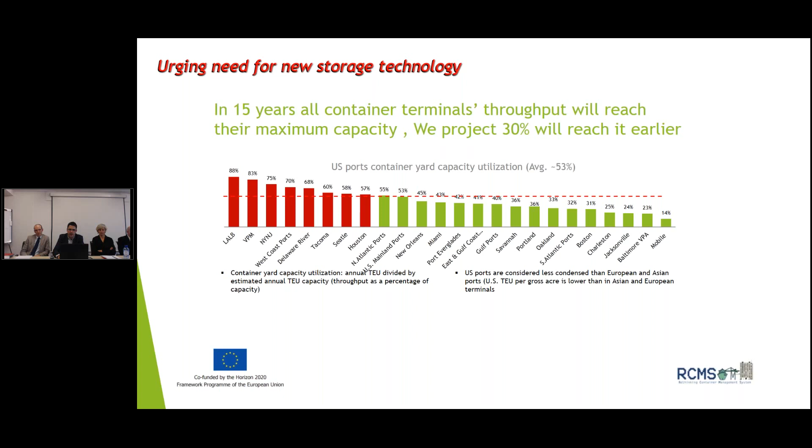And of course, there are the trivial alternatives, which are building a new port, a new terminal. But not always is it easy, not always is it a simple solution, because as you see now, the next slide shows a few examples showing that the cost of building new ports is, of course, tremendous. We're talking about hundreds of millions of dollars.

This is a very costly business, and we identified that we can suggest a new technology for vertical storage, a new idea, a new concept for how to store containers with less space, and then you need less area, smaller reclamation projects. Depending on the area, sometimes it's simply not possible to expand the current terminal, and sometimes you have to consider building a new terminal. And with having the RCMS, we can suggest existing terminals either to expand using less space, or build new terminals having a much more optimized land utilization.

Coming next, we see that in the future, more and more we discuss with clients and companies, and we see that there are more and more ideas to fulfill and develop concepts of vertical storage. We see examples in Tokyo, where a system was already built, and examples of concepts being developed in Korea and in Italy.

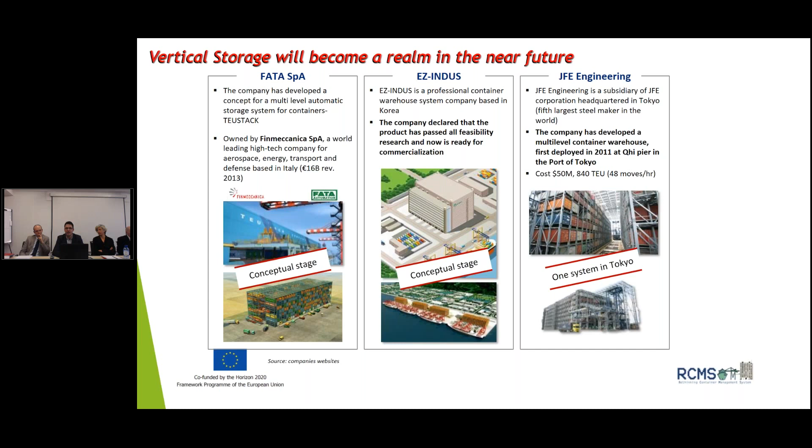And then we move forward to the financial analysis, which is part of a discussion by Niels from HPC.

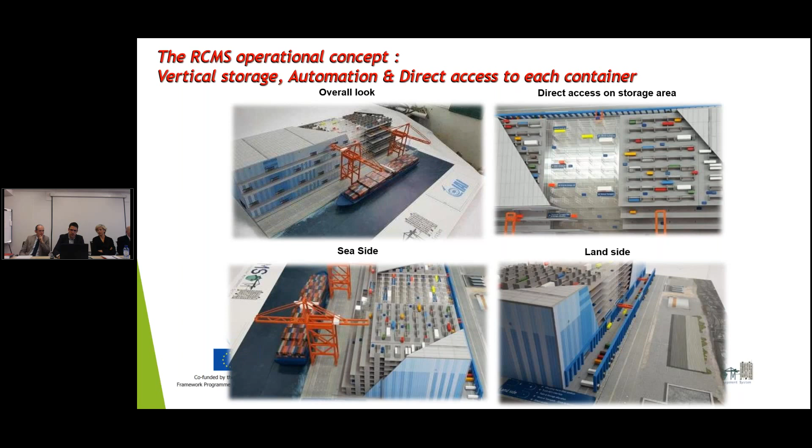So what we present with the RCMS is a vertical storage, automated, providing direct access to each of the containers, which we will see in a moment. We developed together with our partners a preliminary design for the building. We analyzed 10 and 15 floors high, and we came up with a concept that is end-to-end, dealing both from the sea side up to the land side.

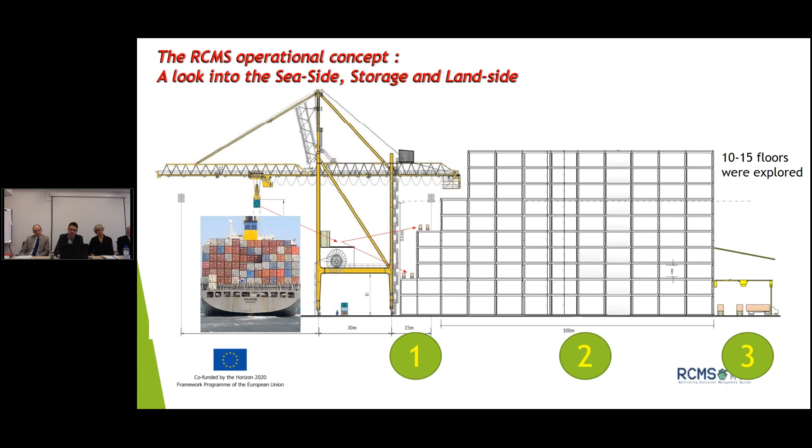We have a full separation between the two. We have balconies on the sea side, dealing with containers being received, unloaded or loaded from the ship. On the other side, we have what we call OHBCs, overhead bridge cranes, for the interface with the land side between the trucks and the AGVs. All the area in between is used for the storage of containers. Each floor has one height of containers, which is also why we have direct access per container.

On the balconies, the twist locks are unloaded before unloading the container onto the AGV. We use STS cranes, which have a platform between the legs of the STS to unload the twist locks, then bring the container without the twist locks on top of the balcony, on top of the AGV. We have queue management on top of the balcony, and we differentiate between the loading process and the unloading process.

For unloading from the ship towards the storage, it doesn't matter which free AGV we allocate. We have some sort of competition in our algorithm between the AGVs, and we allocate the specific AGV that comes, not necessarily the quickest, but at the time we best need it to be under the crane. As opposed to unloading, when we unload a container from the ship, it doesn't matter which AGV goes, but when loading a container towards the ship, we need to manage a specific order.

In order to do that, when a specific AGV comes before another AGV, what we have is a cyclic queue on top of the balcony, so they go in cyclic queue under the STS until the correct AGV is under the STS. When we implemented that, we also checked for any traffic jams because of that concept. There were none. Everything was working very smoothly.

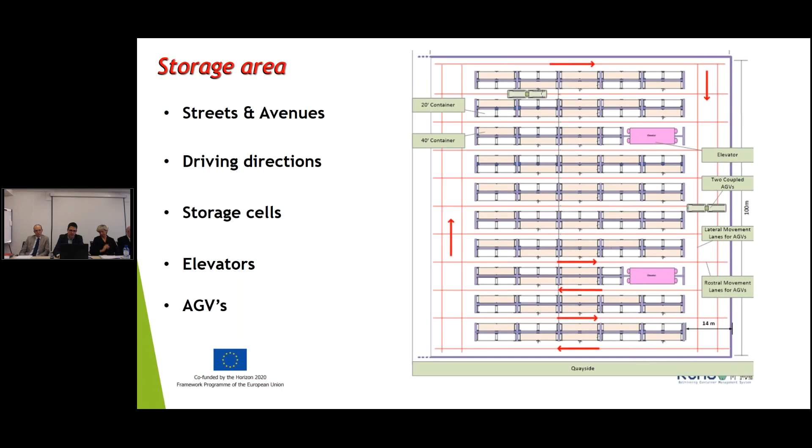Inside each of the cells, this is how it looks, already coming from the CAD file, then rendered in the movie. We have direct access per each of the containers, meaning the AGV is driving in the street, and with a single move it can go to either side and unload or load the container, so there is no shuffling.

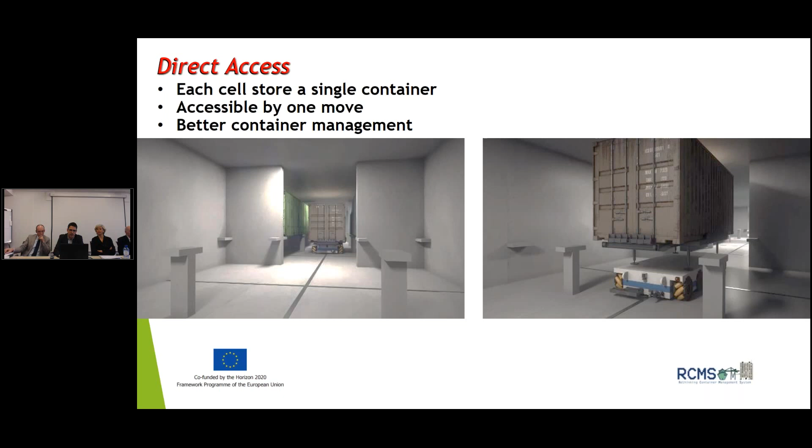We developed an AGV during the course of the project which is smaller than a single 20-foot container, and it goes below the container. It has a very unique platform with pistons, and as you can see, it goes below the container, using the lowering or raising of the pistons to take the container, then goes out of the storage place.

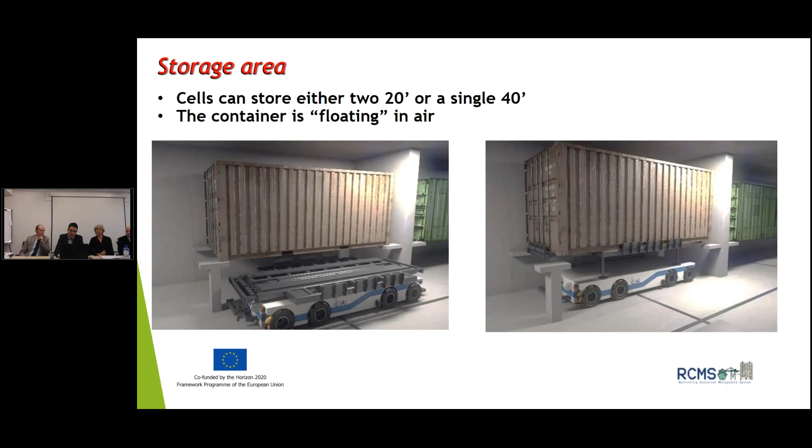It's magnetic tapes that the AGVs are following. This is the rendering of an AGV coming from the CAD file. It was fully designed with the mechanical teams. We had an algorithm team, software teams, and a mechanical team for the development and design of the AGV.

This AGV, what you see here, are two AGVs being coupled. It doesn't matter from which side of the AGV the other AGV is coming; we have the mechanism on both sides of the AGV, and then the AGV can be coupled automatically to carry one long 40-foot, or each of them can carry a single 20-foot.

The AGVs are omnidirectional, meaning that as you saw in the movie, they can drive in either direction. We tested thoroughly the performance of the AGVs with regard to vibrations and effects on the containers, and we saw that it performs pretty well. Although the velocity of the AGVs is lower than current existing AGVs, in overall performance it didn't really matter because of the algorithms and the optimized way we handle all the AGVs and resources within the building.

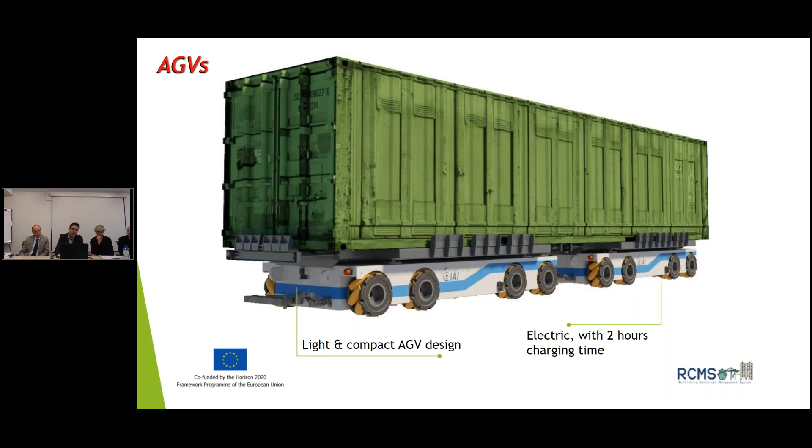During the course of the development, we did very thorough work integrating the interface of the control of the AGV and the physical world.

Do I have the time? Do you have time for 2 minutes to show a video? Okay, and we'll show you now.

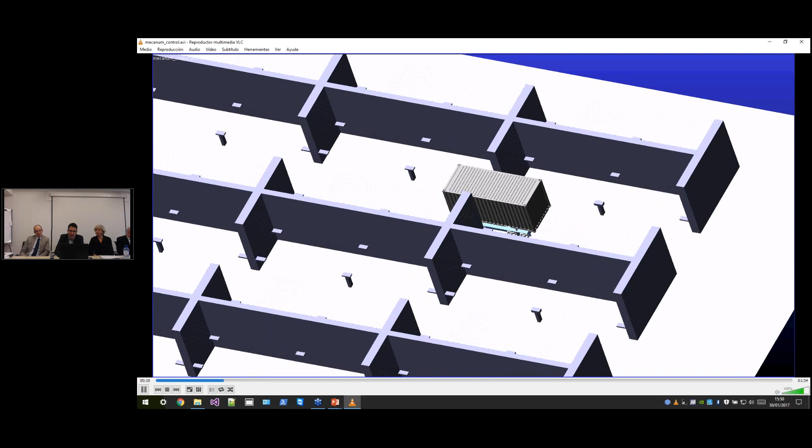This is a movie coming out from one of the design tools of the AGV. It's running a simulation of both the control and the physical world, and they are all interacting with each other.

You'll see in a moment that the movie, when you first see it, is decelerating towards a full stop, and that is simulated via the control, the Simulink. When it goes downwards, you see it's not going in a straight line; it moves a little bit sideways, and then the control is all the time fixing it.

What's important to understand is that all of that supports and backs the design, so that now we have something that really works, even though it's not yet existing. But using such tools, we can actually go to building such an AGV, and we prove that it's working according to the specification and requirements. This simulation takes into account sensors, motors, everything within the vehicle.

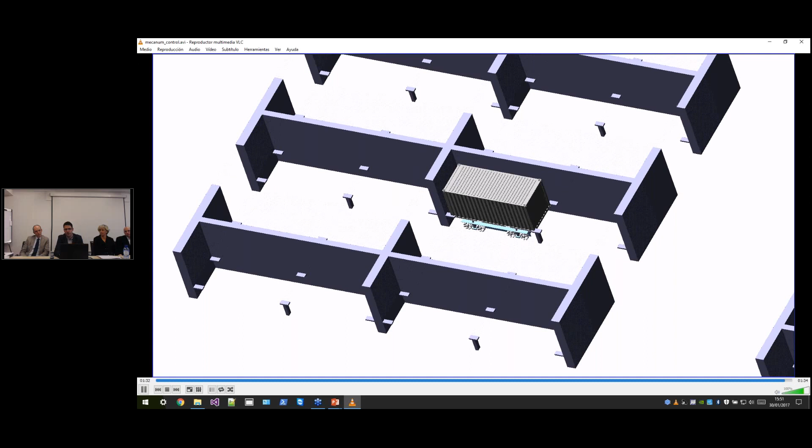And we developed all the control that then provides us with the performance of the vehicle, backed by the simulation: the vehicle velocity, the speed, the acceleration in each direction. Then later on, those parameters were provided to HPC to make the overall simulation of the entire building.

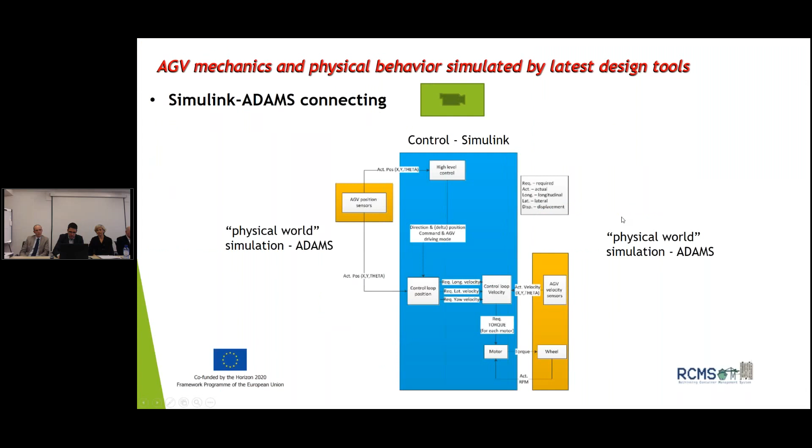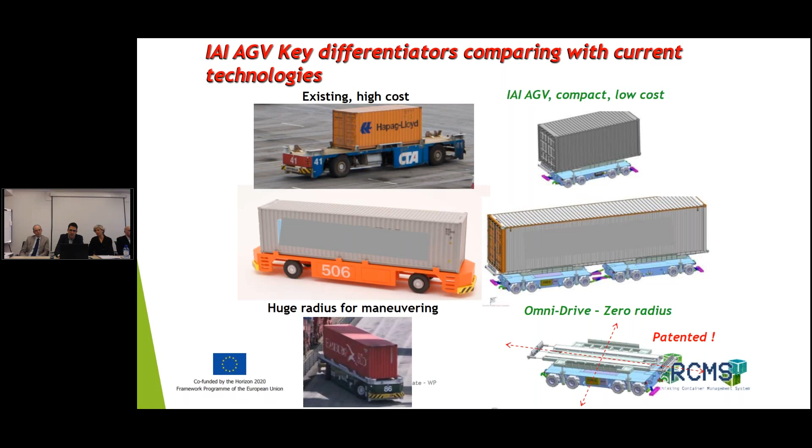And then one last slide, I think, about the AGV. When comparing it to the existing ones, we see that the existing ones are really huge, with huge radius for maneuvering, while our AGV is compact, light, zero radius for maneuvering, and of course much cheaper.

I won't get into too much detail about the elevators. It's a simple technology with cables, able to carry 70 tons. We did a design also for that one.

And then we are able to send the truck to the correct parking slot and the AGV to that specific parking slot. This was also tested with the simulation, and the algorithms performed very well.

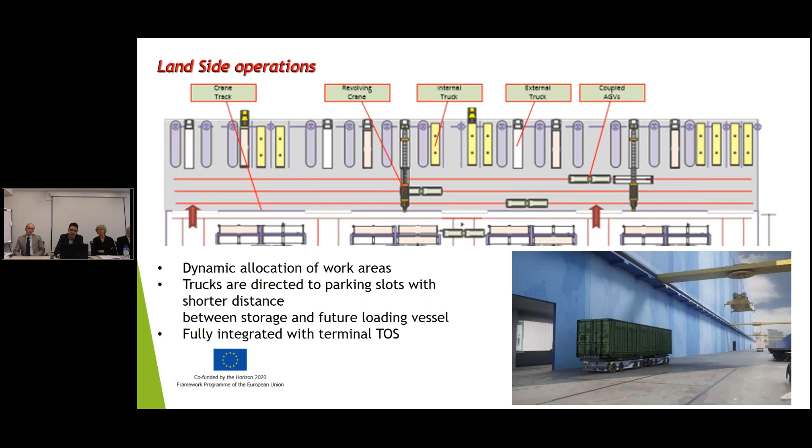So to summarize, we have done a feasibility study. We are ready for manufacturing, because now we have great confidence in our ability to move forward. We at IAI are now looking for partners worldwide to go hand in hand with us to build the first pilot and move forward, fulfilling our vision for the future of vertical storage, which we believe RCMS can have a major role in. So I thank you very much.

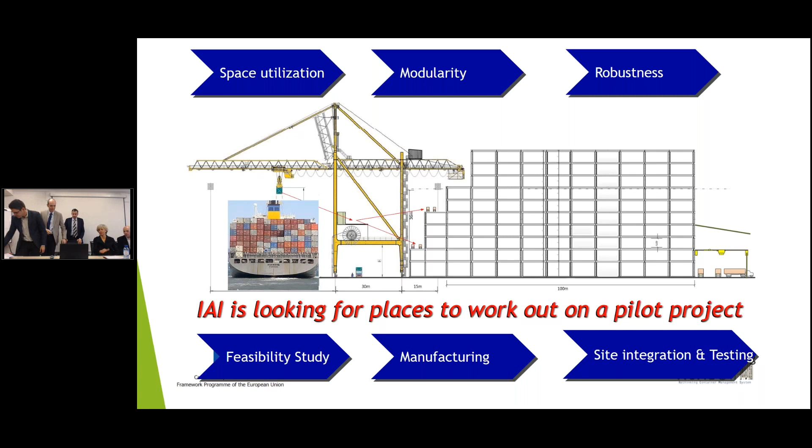So, also thank you, Anand, for the good introduction, which is a good starting point for my presentation. Having seen the basic functionalities and idea of the RCMS, I would like to address whether the RCMS is actually a better solution than other systems, whether it is more efficient. For that purpose, we compared the RCMS with regards to several aspects, mostly operational and financial, against state-of-the-art systems.

As state-of-the-art systems, we consider on the one hand the RTG TTU system, rubber-tired gantry cranes working together with simple manual trucks, a fully manual system. This is a benchmark since it's still the most popular system in the world. The other benchmark clearly is the ASC AGV system, automated stacking cranes combined with traditional diesel-powered or electrically driven automated guided vehicles. We compared the RCMS against these two systems.

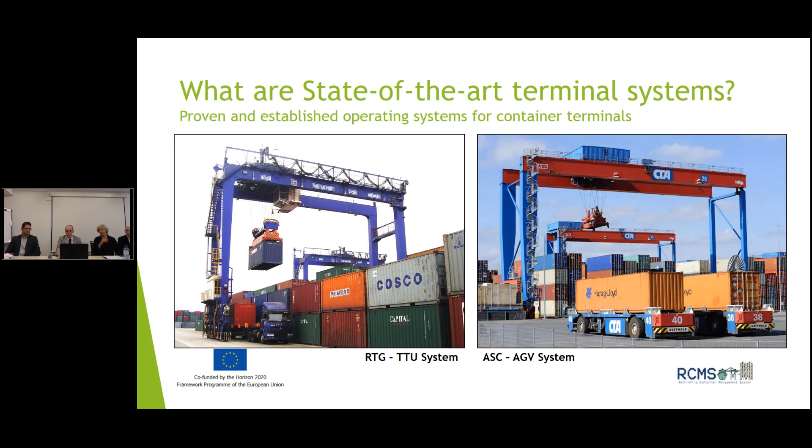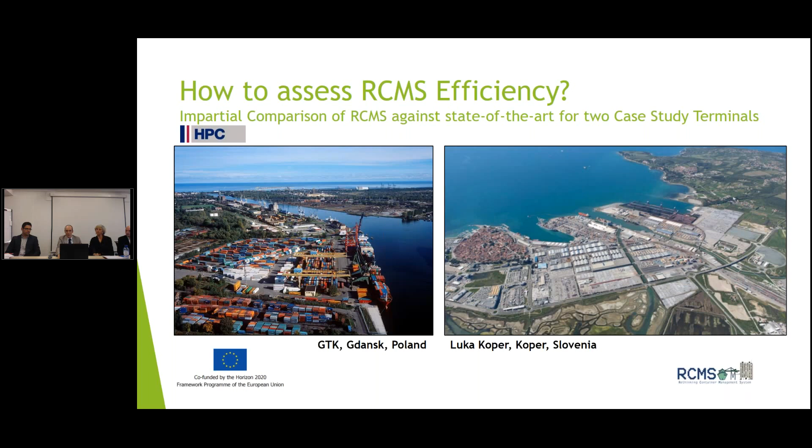And we haven't just compared the RCMS for arbitrary terminals on a theoretical level. We've done it for two actually existing terminals, the GTK in Gdansk, Poland, and the port of Koper. On the left you can see the GTK from a bird's eye perspective, and here a schematic view of the terminal. It's a rather small-sized terminal compared to Koper, which is a port of relevant size, a really big port, making it quite good for our comparison. So we had two very different kinds of terminals to look into.

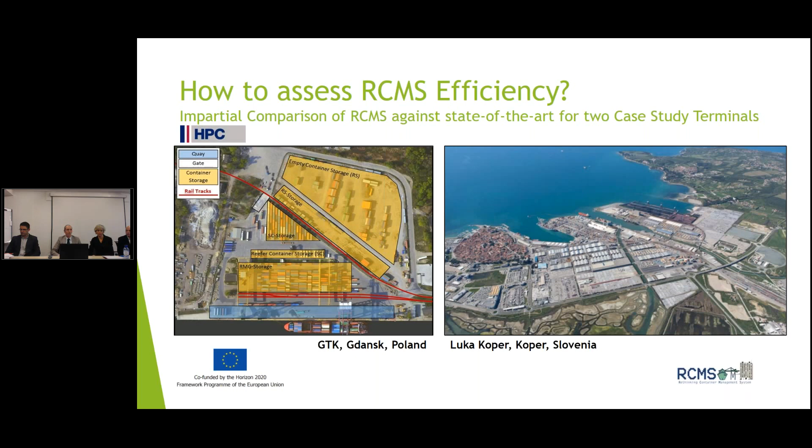The terminals also differed in other aspects. At GTK it was a conversion, an existing area that had to be converted. For Koper it was a greenfield project. For GTK, since we were given a certain footprint of an existing terminal, the idea was to maximize the capacity for that given area. For Koper we were given an outer footprint, an outer framework, where reclamation would be needed. So the idea was to minimize that reclamation while still hitting a certain target capacity.

So we looked into these two case study terminals and did a four-step analysis.

You can see here in the top row the alternatives for GTK, for Gdansk. From left to right, it's the RTG solution, the automated stacking crane solution in the middle, and then the rightmost is the RCMS. In the same order, on the bottom row, you can see the layouts we've developed for Koper. You can right away see that the RCMS requires significantly less reclamation than the other solutions need.

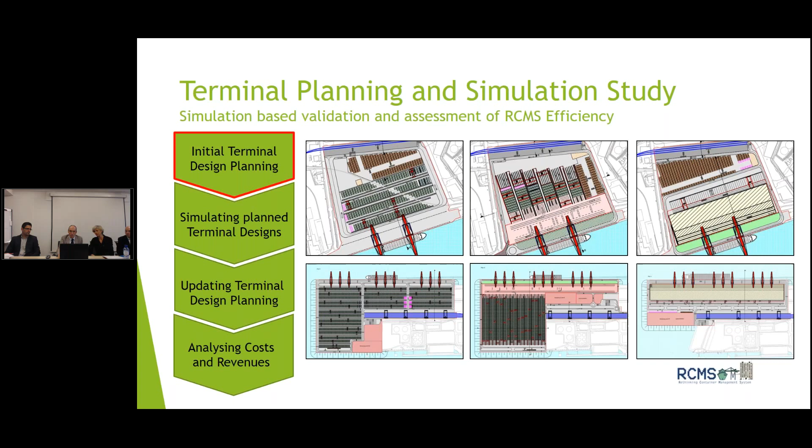Following the design planning and development of the layouts, we have modeled and simulated all these layouts in really much detail, including all the physical equipment movements, all business processes involved in such terminal operations, and all algorithms involved in the decision-making process for the automated equipment.

Here you can, for example, see a video for the simulation of the RCMS solution for Koper. You can easily identify the vessel at the quay cranes, then you have the building, the RCMS building, in the middle. We cannot look inside the building since it consists of several floors, but these are, of course, also all modeled in detail. However, you can see the AGVs moving around on the balconies.

As Hanan said, they're partly running in circles, which is needed for the queue order, to respect the order of containers that is needed by the quay cranes. At the land side, we have the OHBCs running around, unloading or loading the trucks and the AGVs, and we even simulated the rail station on the terminal to take into account the movement of containers between the RCMS building and the rail station.

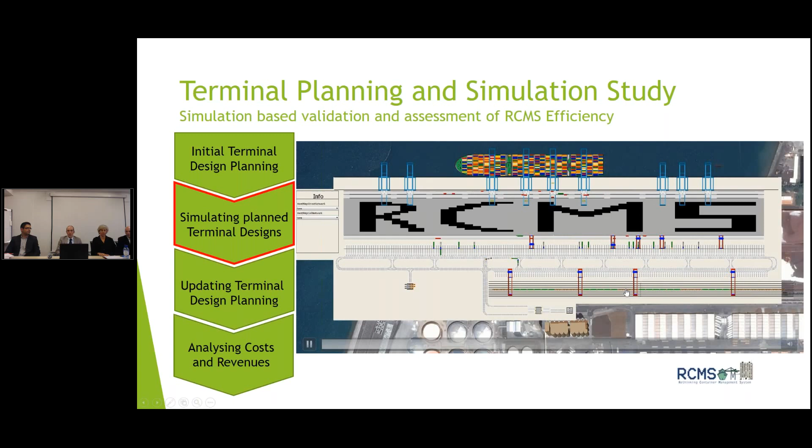Of course, the simulation doesn't just provide nice pictures, it also provided very helpful insights into the operation of the RCMS and the other technologies. However, we were mostly interested in the insights into the RCMS.

In practice, we have seen that by adding more equipment to the RCMS, we were actually able to yield much higher productivities than just 30 moves per hour. However, to make it comparable between the different alternatives, we stick to a target productivity of 30 moves per hour.

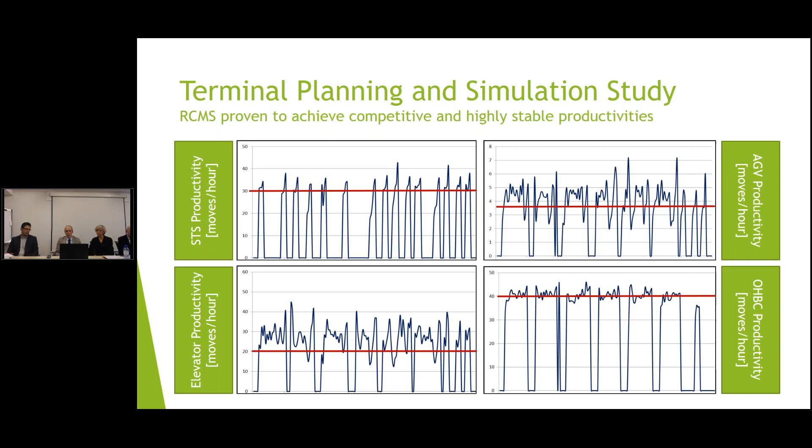And here on the right lower-hand side, you can see the productivity of the OHBCs, which are incredibly productive with some 40 moves per hour, which simply is due to the fact that they don't have to move that far. They can stay in the same place most of the time, so therefore they're working at pretty high productivities.

Based on these simulation results, we then refined our initial terminal planning, and we were able to come up with the most efficient equipment setup for each of these alternatives: the RTG alternative, the automated stacking crane alternative, and the RCMS alternative for both ports.

For example, for the 15-high RCMS alternative for GTK, we identified that 7 elevators are needed, 2 OHBCs, and 51 AGVs are needed in order to hit a target productivity of 30 moves per hour at the waterside.

Apart from these pure numerical results, the simulation also revealed that the RCMS operational concept, the logistical concept, is feasible as such. It is realistic. We haven't seen any big problems, any obstacles. It's doable. The simulation also confirmed all business processes and the algorithms that have been developed by AI.

Frankly speaking, I was very surprised how good these algorithms performed right away without much fine-tuning needed so far. They were right away able to provide really competitive productivities. I would even say the system still includes a big potential for further improvements. It's still an immature system, but we can spend efforts to optimize the algorithms, increase the speed of the vehicle, and there is easily a potential for improving the productivities of the machines by 10 to 20%. That's absolutely realistic.

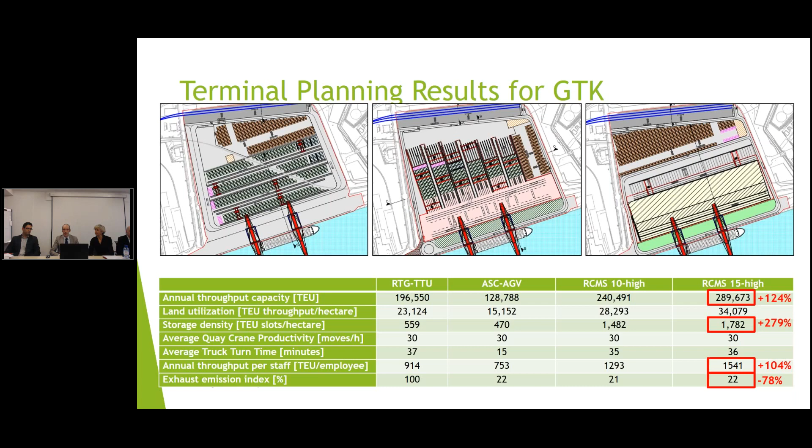Also pretty noteworthy from my perspective is the ratio between throughput capacity and number of employees, and here too the RCMS performs by far the best. Looking at the environmental side, we can also see that the RCMS is the best one with regards to exhaust emissions, clearly and significantly reducing local exhaust emissions compared to traditional RTG solutions.

For Koper, we see pretty much the same results. The RCMS is best with regards to storage density, best with regards to the annual throughput per employee, and also best with regards to exhaust emissions.

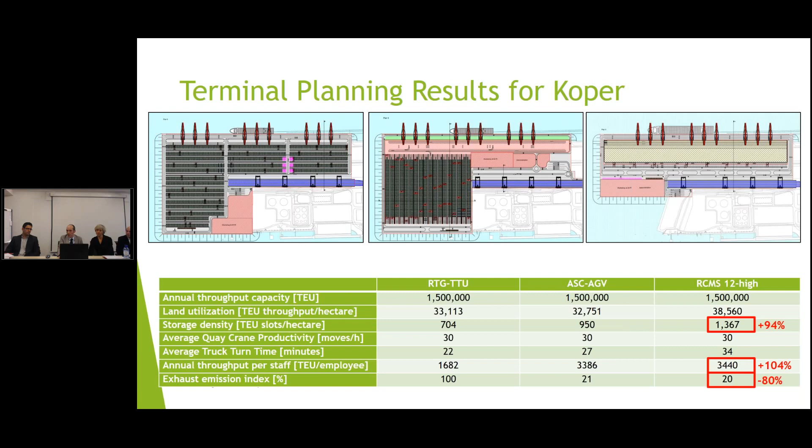We of course know that terminals are not just interested in providing a good operational performance. In the end, the system also has to be financially viable to some extent. Therefore, we also looked into the costs and revenues for these systems, based on the actual cost and revenue structures for both terminals. So it's based on actual numbers from these terminals, and we looked into the investments, the operating costs, and the revenues for each of these layouts that we've developed before.

Considering the fact it's based on actual numbers, which are of course commercially sensitive information, we cannot reveal these numbers here. These are considered confidential. Therefore, I would just say some words about some key findings of the financial analysis.

We can say that the RCMS equipment investments are lower than for state-of-the-art automated systems. It requires actually lower investments than ASC AGV systems. On the other hand, construction costs are, which wasn't really a surprise, higher considering the size and the dimensions of the building. However, we will see in the next presentation that the construction costs depend on several factors, mostly the soil conditions of the actual site.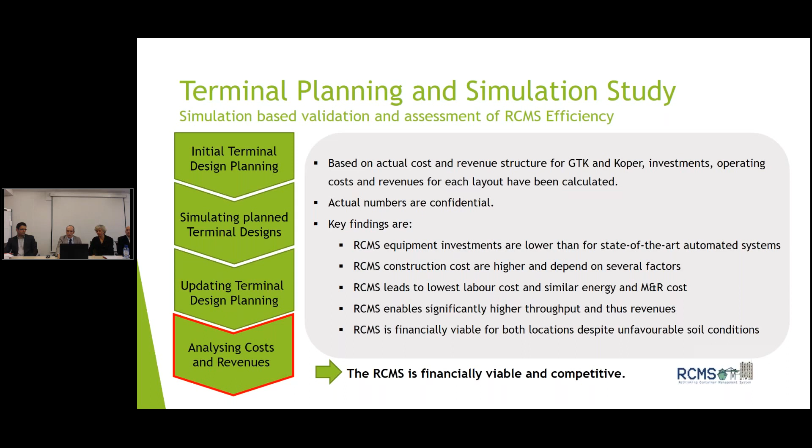So we can also conclude that the RCMS is not only operationally viable, but also financially viable and competitive. In summary, summing up all the findings, we've so far just talked about costs and operations. On this slide, you can see that there are so many criteria defining, or that have to be taken into account, for terminals when making a decision towards a certain operating system for their terminal.

We've seen that on the investment costs, the RCMS is clearly not best. On the operating costs, it has its advantages, clearly. For the operations, there are some factors where the RCMS is better, others where the RTG and the ASC solutions are better.

But in total, one point clearly has to be highlighted here: the storage density. This is a unique selling point for the RCMS, where no other solution can compete. And something which has not been highlighted so far are the environmental aspects.

We have partly touched the area of exhaust emissions, where we said that the RCMS is best, but it also has to be mentioned that the RCMS is best with regard to noise and light emissions, which is a topic becoming more and more important, particularly for ports in urban areas, city areas. And since the RCMS building is completely covered, it reduces noise and light emissions significantly.

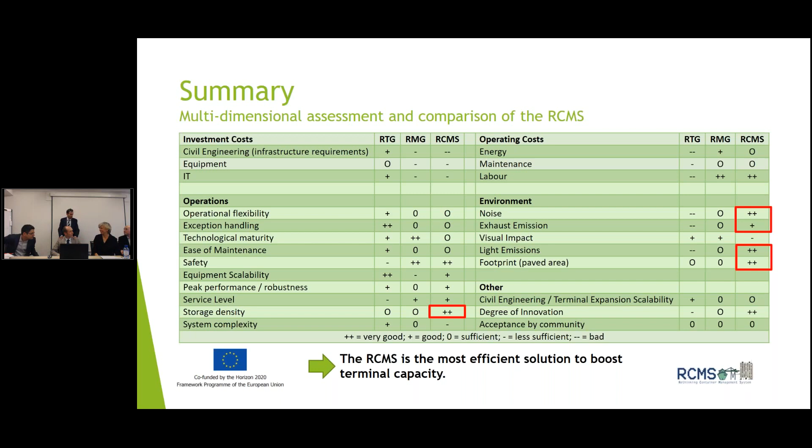What happened? I don't speak Spanish. The presentation is open.

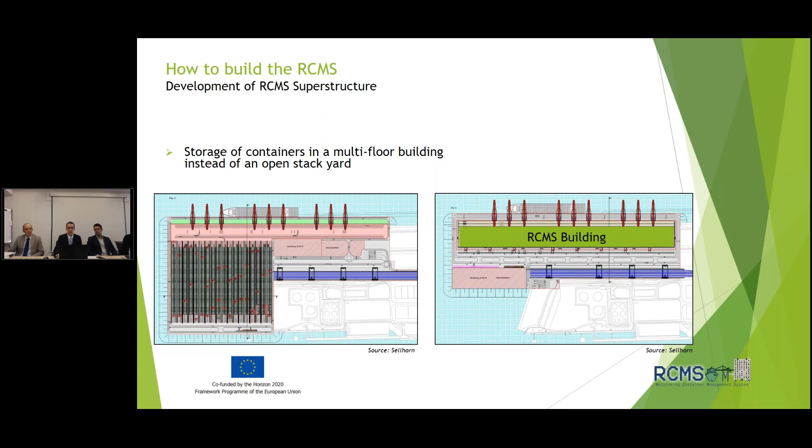One can easily imagine the basic features of such a building, which are storage of containers, of course, and accessibility by AGVs. What we need for that is a load-bearing system capable of transmitting high loads from the top of the building to sound soil, while at the same time guaranteeing the AGVs enough space to reach every container. The initial idea for the load-bearing concept was a grid of longitudinal and transversal beams supported by columns.

Due to the high loads which had to be transmitted by the columns, their diameter rose up to 1.4 meters, and the utilization of space in the RCMS building turned out to be inefficient. This is why the load-bearing concept was changed to longitudinal and transversal walls, which have a thickness of only 60 or 40 centimeters respectively. In addition to that, this kind of concept offers more efficient utilization of space, improved redundancy of bearing members, a more robust structure, and an even distribution of loads.

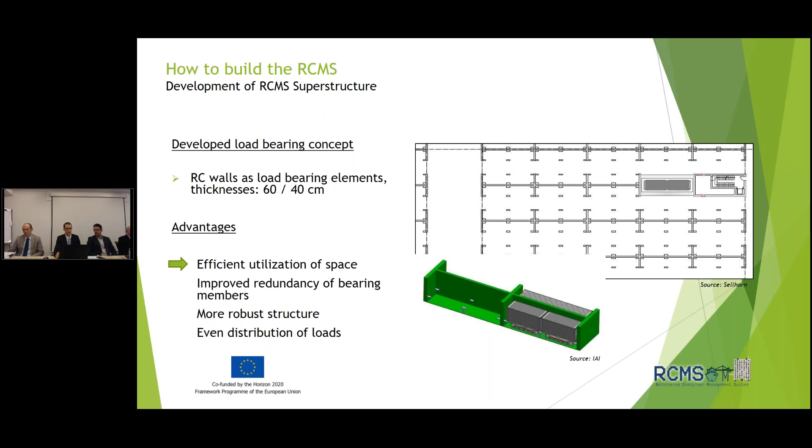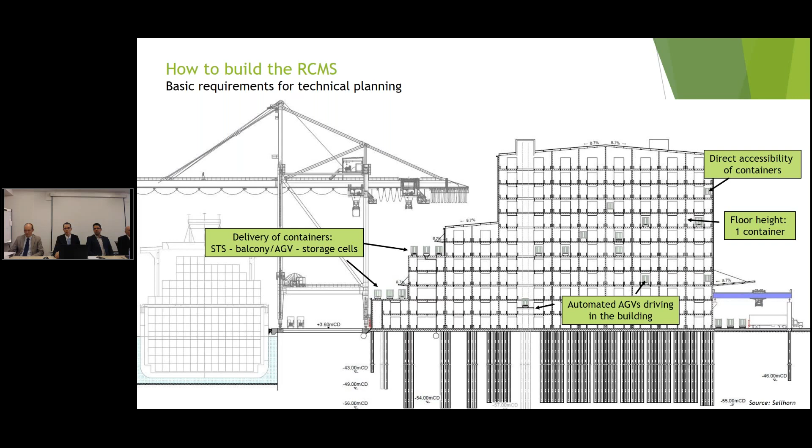The basic requirements which had to be fulfilled by the RCMS building are easily explained by its cross-section. The containers are delivered directly from the STS cranes onto the AGVs on the balconies. The AGVs take the containers into the RCMS building to the designated storage position. Further on, the AGVs are supposed to drive automatically through the building on every floor. The floor height is designed for one container, and the AGVs should have direct access to every container anytime. This means no shuffling is required compared to state-of-the-art solutions.

Now that we've talked about how the RCMS building can be constructed, let's look at some key factors for success. The aim we're trying to achieve is to store a large number of containers in small space. What we need for that is a high building with several floors, a solid superstructure, and a foundation able to bear heavy loads. This leads us to the following key factors, which I've partially already mentioned: storage of heavy loads, fully automated operations, AGV serviceability, and location.

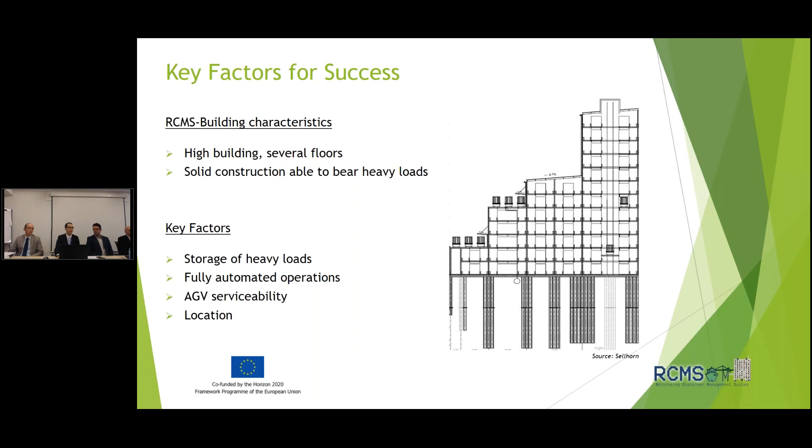In order to store heavy loads, the superstructure of the building must be capable of transmitting those loads down to the foundation. Reinforced concrete is physically capable of sustaining high pressures and bearing heavy loads. Furthermore, it's been used over centuries, and its long-term performance, like shrinkage and creeping, is well known and can be predicted. And following the bearing system further down, it's obvious that the foundation must be capable of transmitting the same amount of loads into sound soil as well.

For the sites we've been investigating in the course of this project, quite long bored concrete piles were necessary to transmit those loads. It's obvious that the soil conditions are site-dependent and cannot be predicted from now on. This leads as well to the conclusion that the foundation must be adapted in size and dimension.

The RCMS is planned to be a fully automated system. The presence of man in the RCMS building is not allowed during usual service. Only in case of maintenance and repair or emergencies should personnel get access to the building. Nevertheless, the presence of personnel should be kept to a minimum. This is why staircases and elevators for persons should be installed infrequently in the RCMS building.

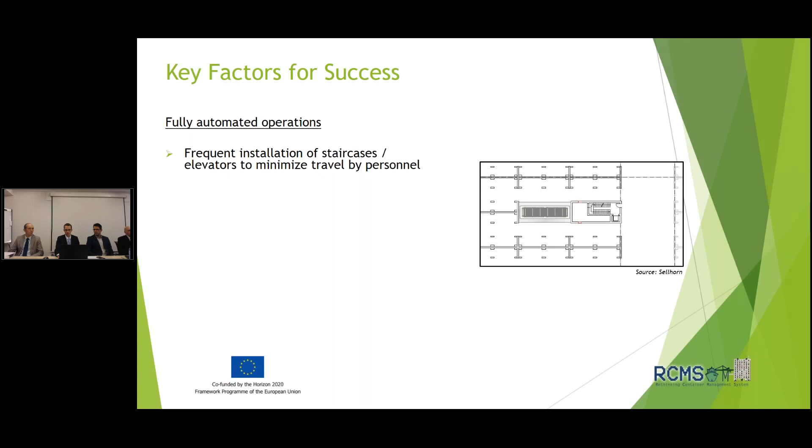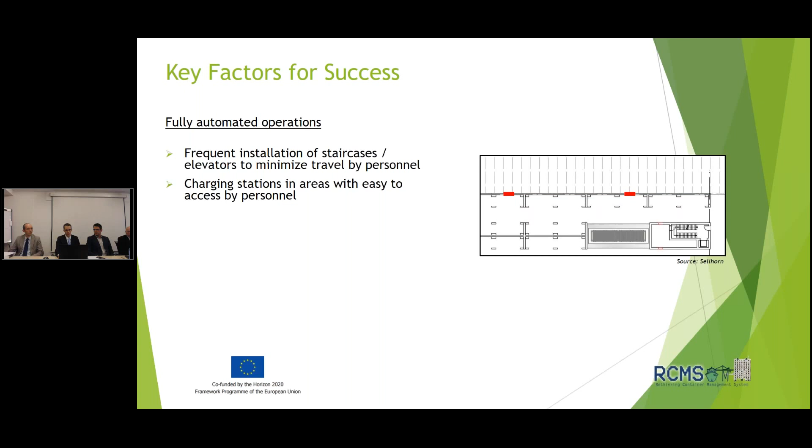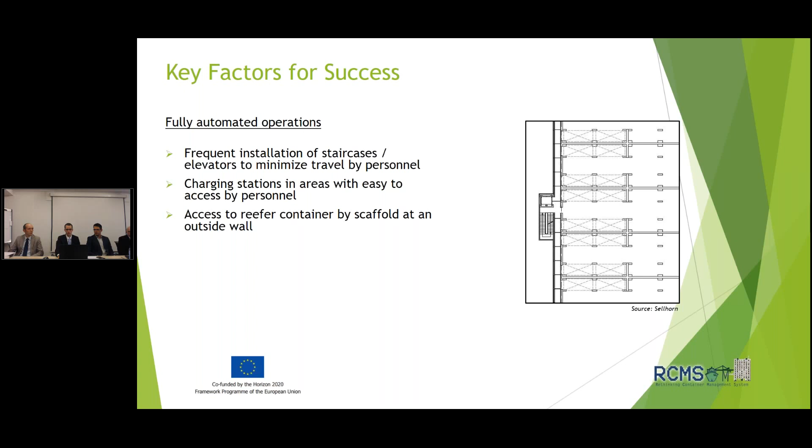The charging stations for the AGVs should be installed in the longitudinal outside wall, so personnel could access the charging station without entering the building. Or they could even be installed in close vicinity to the staircases to minimize travel by personnel in the RCMS building. The reefer containers should be stored right next to the lateral outer wall, so personnel can reach the reefer containers to check their temperature or connect them to a power supply by an outside scaffold, and as well, of course, without entering the building.

In order to guarantee a smooth and proper AGV service, the floors of the RCMS building need to be as even and horizontal as possible. The largest gaps which need to be bridged by the floor construction are the avenues. They are located in between the modules of storage cells and have a span of 14 meters. Due to this long span, the floor construction needs a very high stiffness.

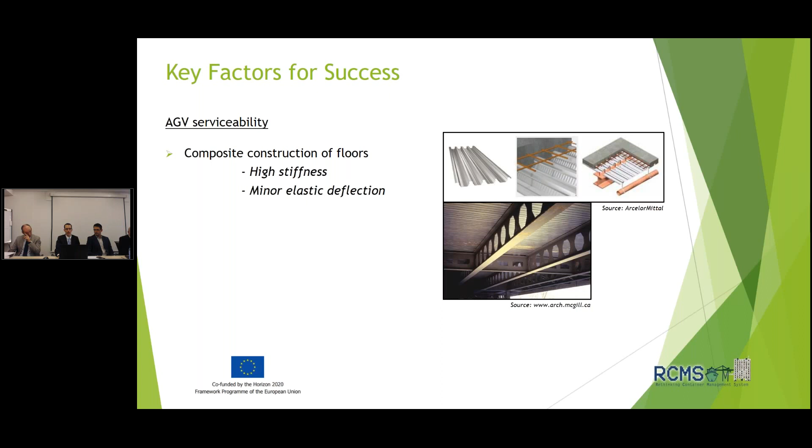To guarantee such a high stiffness, the floors should be built as composite construction, using materials like steel beams, corrugated sheets, and reinforced concrete. This guarantees a high stiffness and minor elastic deflection of the floors.

It's obvious, of course, that if we would like to provide horizontal floors, the whole building itself must be horizontal as well. By using a deep foundation, large layers of soft and unstable soil can be bypassed. This would be the case for the site we've been investigating in Koper, where we had unstable soil up to a depth of around 40 meters.

So using a deep foundation with bored piles, we could even build a stable building in such terrain. Therefore, immediate and long-term settlements can be avoided, as well as an inclination of the whole building.

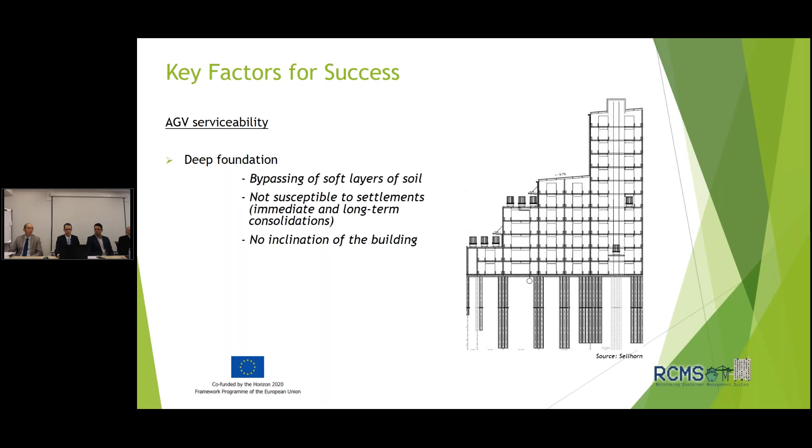The next and last key factor I'll talk about is location. It's easy to imagine that it will make a difference during the planning process if a container terminal is supposed to be located at a shallow coast with vast hinterland or at a steep coast close to a mountainside. The space available can be crucial for its feasibility.

What we see here are two different scenarios for bathymetry. In the left picture, we see a shallow coast, and in the right picture a steep coast, with the red rectangle representing a possible terminal area. In case of mountains close to the shoreline, it might not be possible to move the terminal area further inland. The missing land needs to be reclaimed, and it's easy to see that the effort required for land reclamation is much smaller for a shallow coast compared to a steep coast.

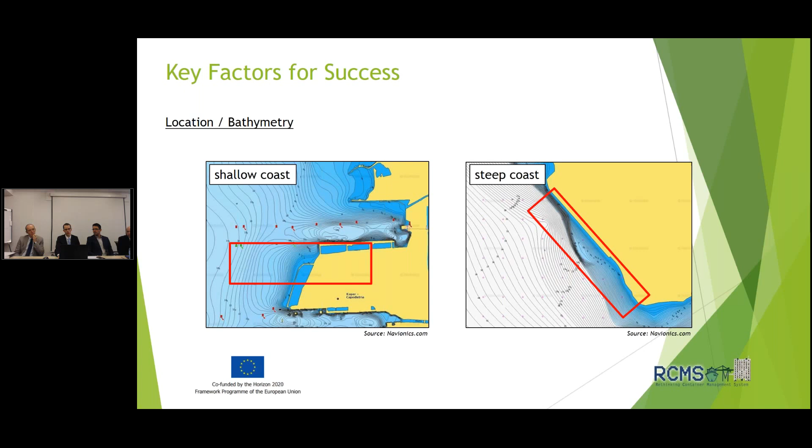This leads us to the following conclusion: the steeper the coast, the more land reclamation is necessary, and the higher the total costs.

In addition, if we look at the footprint of an RCMS terminal and an RMG solution, the RCMS terminal has a footprint about 25% smaller compared to an RMG solution. For a mountainous region and a steep coast, the effort required to provide a terminal area is much higher for an RMG solution compared to an RCMS solution. It might even be the case that it's not possible to build an RMG solution in such a minimalistic area.

This leads us to the final conclusion that the RCMS system is a very attractive solution for mountainous regions at steep coasts. And so far from my side.

Okay, perfect. So, after the presentation of the financial analysis from HPC, we will discuss now the economic appraisal of the

RCMS project. I will give you a short description of the framework and the general background. Then I will present the analysis structure and development. We will discuss the main issues of the cost-benefit analysis, and then we will see in details the case of Koper and the case of Gdansk, the two case studies taken in consideration in our analysis in our project, and then I will give you some final consideration about our work.

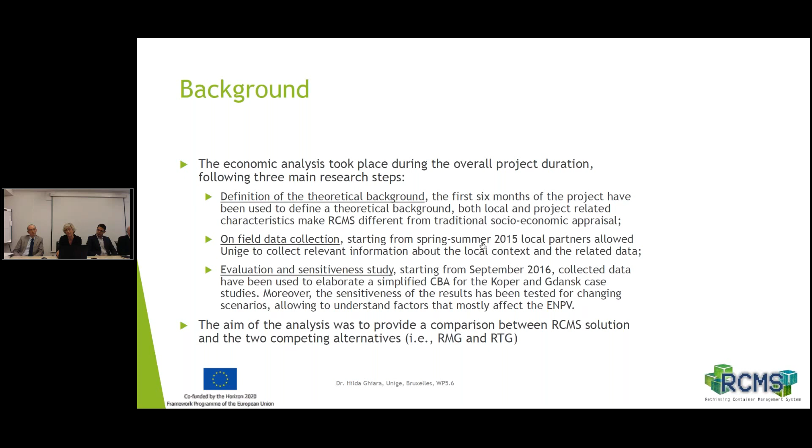The main tool used in a cost-benefit analysis is the ENPV, the net benefit of the infrastructure. Another very important point is that in this case, as in other cases in cost-benefit analysis, it's very important to discuss, first of all, the assumptions and the hypotheses chosen to develop this specific analysis.

In our experience, the first item to underline is that we chose a discount factor of 5%. And this is, of course, a critical element. This discount factor of 5% has been used as a base scenario for the analysis, but consideration including alternative scenarios, specifically the 10% discount scenario used in the financial analysis, have been included in the analysis.

Another very important point is the period, the reference period. In this case, the reference period is set at 25 years, but also in this case, we take into consideration another alternative scenario of 20 years, because this was the reference period for the financial analysis, so we have the possibility to compare.

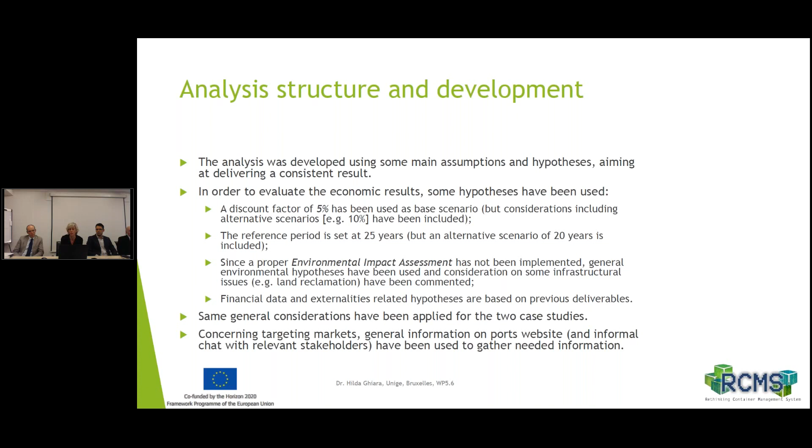The financial data and the externalities hypotheses are, in a general way, based on previous deliverables. So for cost and revenues, of course, the financial analysis, and for environmental impact, we used the results of the model that will be presented by the other part of our university, the engineering department. Concerning the targeting market, general information has been discussed with the different case studies, so the different ports, in order to have a realistic hypothesis on the targeting market.

It's important to underline that the analysis compares the different terminal layouts presented before and the performance characteristics due to competing technologies: on one hand the RTG, on the other hand the RMG and the RCMS, discussing the effect on the benefits to the community, both monetary and non-monetary.

One of the main aims of the analysis is to translate the non-monetary benefits into money, while the costs are mainly monetary and based on the financial analysis. At the end of the comparison I will sum up in the next few minutes...

We decided to elaborate a discussion of the elements normally included in the CBA that have been prudentially excluded from the proposed economic analysis, but are discussed in a general way. Talking about externalities, which were one of the main elements of the analysis, accident and air pollution represent the main considered factors, but during the question period we may discuss this in more detail.

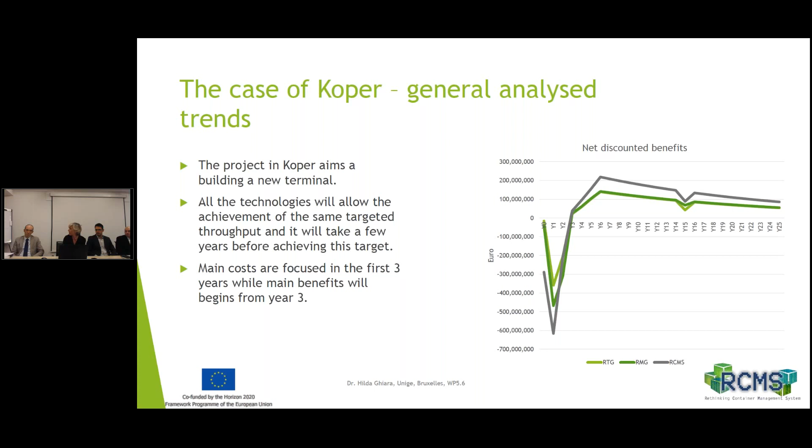As we can see on the graph, the main costs are focused in the first three years, while the main benefits begin from year three. There's an important period around year 15 because we need an upgrade of the equipment, so we face some other costs during this period.

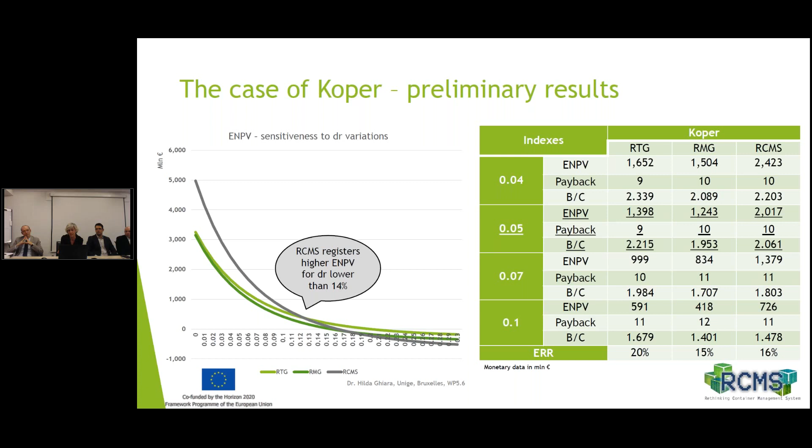On the left, we have another figure describing the sensitivity of the ENPV, the net value, to discount rate variations. We can see from this graph that the RCMS registers a higher ENPV for all discount rates lower than 14%, which is another very important result in the case of Koper.

As I said before, a very important step for the cost-benefit analysis is the sensitivity analysis. In this case, it shows that RCMS is impacted mostly by externalities—air pollution, traffic flow, and modal shift—in the case of overestimation, but it results as the best option in the Koper case anyway.

This figure is very important because it answers the question of what happens if we underestimated or overestimated some items, like revenues. In general, mixed shocks bring different outcomes, but in this case RCMS seems quite resilient and robust even to heavy modifications of particular cost-benefit items.

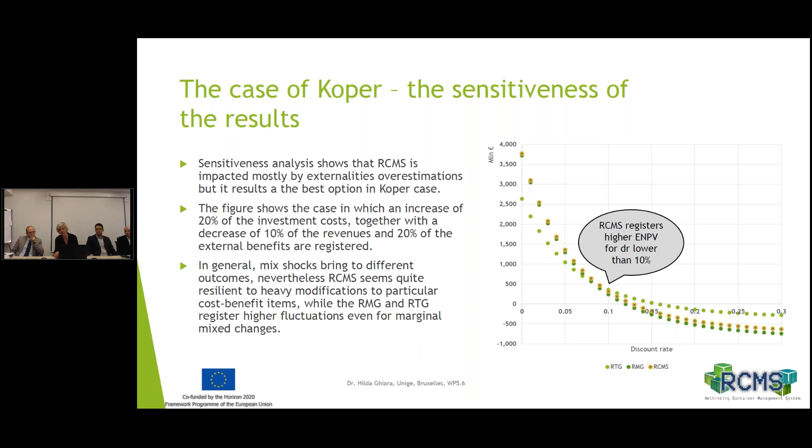While, as we can see on the right, the RMG and RTG—the other two systems—register higher fluctuations even for marginal mixed changes. The RCMS registers higher ENPV for discount rates lower than 10%, which is another very important element in the analysis.

Also in this case, the main costs are linked to the implementation of the infrastructure and are focused in the first 3 years, while the main benefits will begin from year 3. Also in this case, we have some consideration about year 15, because we will have some equipment upgrade. So also in this case, we can give some numbers, some figures about the results.

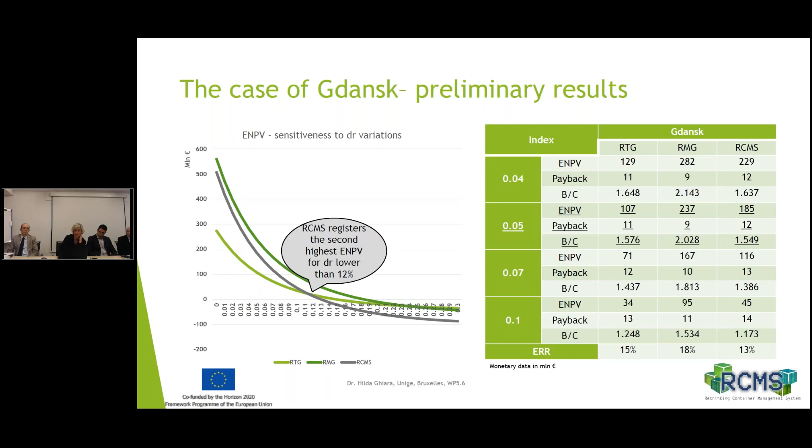We have to underline that RCMS registers the second highest ENPV for all discount rates lower than 12%, as you can see in the graph on the left. So this is the sense of a cost-benefit analysis, which underlines and points out the different situations and the different evaluation of the system for different contexts.

As I said before, also in this case it's very important to focus on the sensitivity analysis. The RCMS is impacted mostly by the externalities overestimation and also by the investment costs. Nevertheless, the other solutions are more sensitive than the RCMS to the high cost-benefit variation.

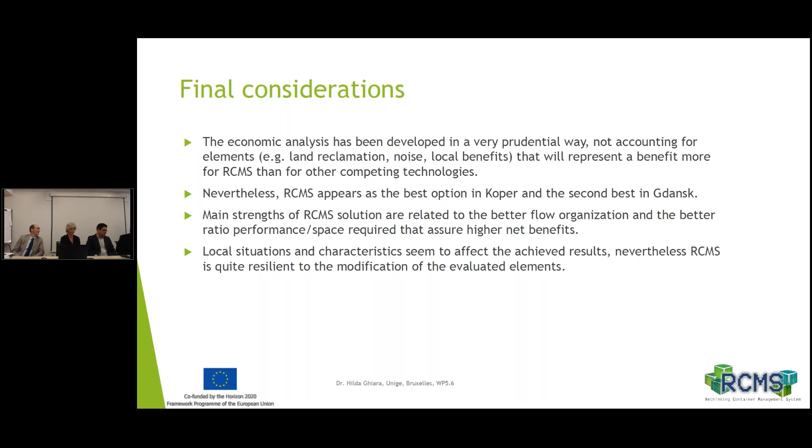Okay, I will try to be short. Give it a try. Okay.

In this talk, I will show you some results, a glimpse of the results about the effect that RCMS can have on the transportation network.

The first consideration is that a seaport, as any other logistic terminal, is not an isolated system. It is a node of a transportation network, and the connection between the different nodes has to be taken into account. So the idea was to assess the impacts on the transportation network, provided that RCMS is inserted in a single or in more than one terminal.

More in detail, we had an estimate of the effects on the land-side transportation network, in particular on the modal shift on a large scale, meaning regional or European scale, and an estimate of the impacts on the local urban traffic network. Basically, the analysis consisted in the realization of two models.

The first, on the left, represents what we call the global model, whose aim was to understand if there is the possibility of driving a modal shift from truck transportation of freights towards rail transportation, which is known to be more sustainable. Then we have the local model, whose aim was to understand which are the impacts at the urban level near the seaport.

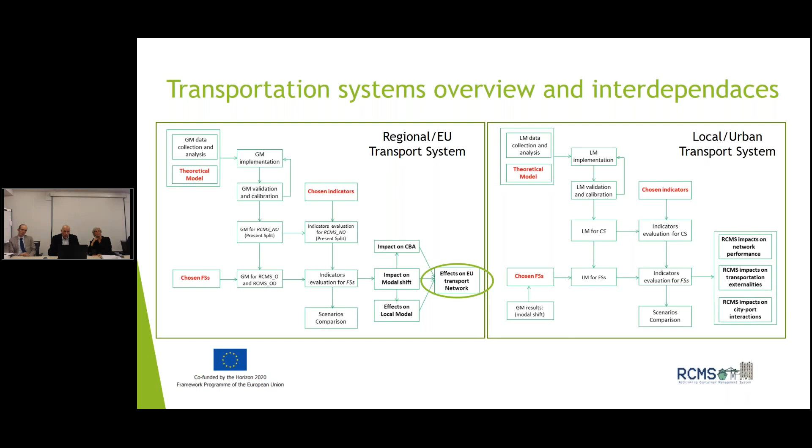The model was developed by considering the third port involved in the project, which is La Spezia seaport. We concentrated our analysis on this seaport because the municipality of La Spezia was also participating in the project and provided the private traffic data, which are necessary to understand the interaction between normal users, citizens that live in La Spezia, and the freight flows that come or go to the seaport.

La Spezia is a medium-scale seaport characterized by 1.3 million TEU per year, with more or less half and half import TEUs and export TEUs.

What is interesting, and in effect very important from the point of view of the analysis, is that most of the origin-destination relations of the seaport are characterized by a quite high rail percentage, because this seaport is very well organized and vocated to rail transportation.

So we have even a case, Veneto 1, which is characterized by more than 60% rail transportation percentage. Other destinations, the ones nearest to the seaport, are characterized by 100% road transportation, but this is reasonable because of the distance.

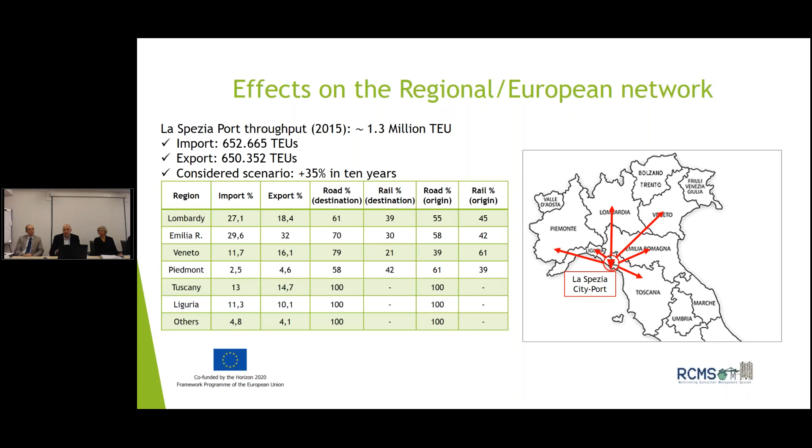We consider an increase of throughput and capacity around 35%, which is more or less what is promised by RCMS. In this analysis, we consider basically three scenarios.

The present scenario, characterized by a low automation level, which involves some manual operation and, of course, some automation, but man-operated ones. Then we inserted RCMS only in the origin seaport.

We consider what happens if only La Spezia is characterized by the presence of RCMS, and what happens if even the destinations of the seaport's relations are also characterized by RCMS. Of course, reducing the cost in the origin, and reducing the cost both in origin and destination, provide different results. The output of this analysis was the modal split.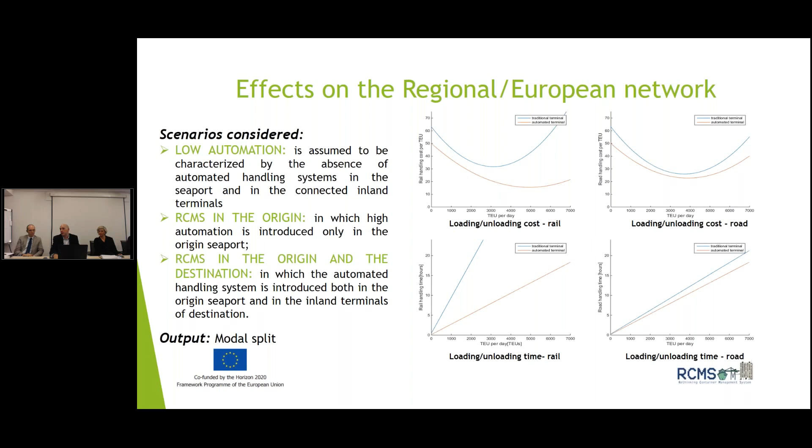That is, the percentage of freight that chooses road transportation or rail transportation. Here are some of the findings, just a glimpse. It is a case of a medium distance relation, which is characterized by a high percentage of road transportation.

We can see that in a horizon of 10 years, these percentages can change a bit. In particular, the percentage of rail transportation increases if RCMS is in the origin and destination, by about 10%.

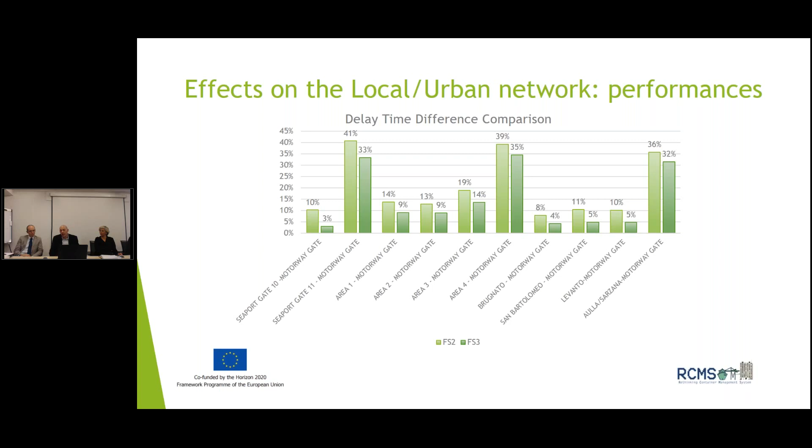This analysis, together with the related analysis of pollutants, noise, and accidents generated by the new traffic, can be considered in a more general framework that takes into account that what vehicles generate in terms of pollution is saved by, for instance, the engine system inside the seaport, which is electrically powered. So from the global city point of view, what is an increase in traffic can be a saving in the seaport. The balance can be positive, but that's a matter for other analysis.

To summarize, increasing capacity via RCMS, meaning raising the automation level compared to other possibilities, leads to a reduction of the cost and time of load and unload operations. This comes because operations are more reliable and the congestion effect inside the terminal is reduced.

This translates into a modal shift towards more sustainable transportation systems like rail. But it's important to consider that while RCMS has the potential to drive a modal shift, the rail transportation network inside the seaport, and also outside it, has to have the capacity to absorb the increasing number of trains. Otherwise, anything we do inside the seaport is not significant for what happens outside.

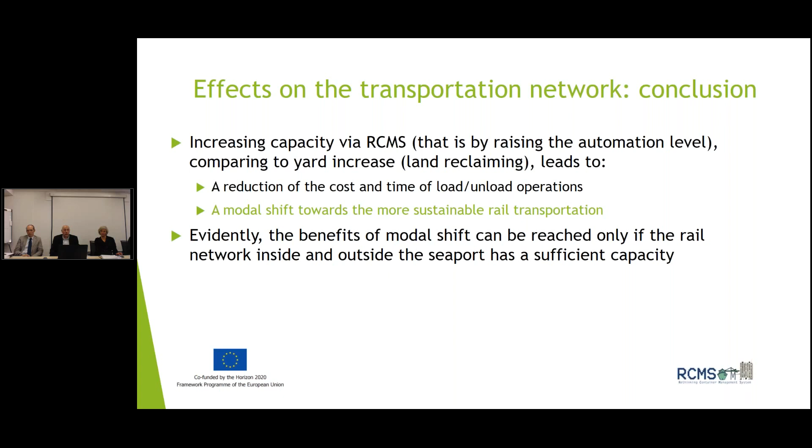I finished, I was very short. It was very much on time. We have just finished. It seems we were definitely more clear than the first time, when more questions came from the panel. We got nearly 20 attendees, more or less like last time. So I think we can close the webinar here. We are a little late, but I think an hour and a half is the time needed to present all the results we got so far.